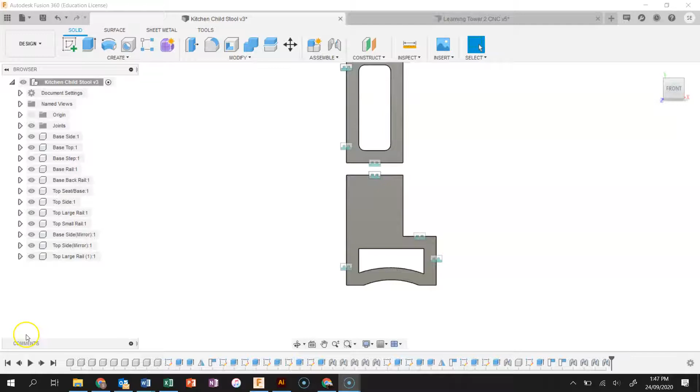Alright, g'day everyone. In this set of videos I'm going to be talking about how you prepare to route out, using the CNC router, a product like this—something that's made out of panels. Obviously this is a fairly complex one with lots of parts, but generally a product that's made out of panels.

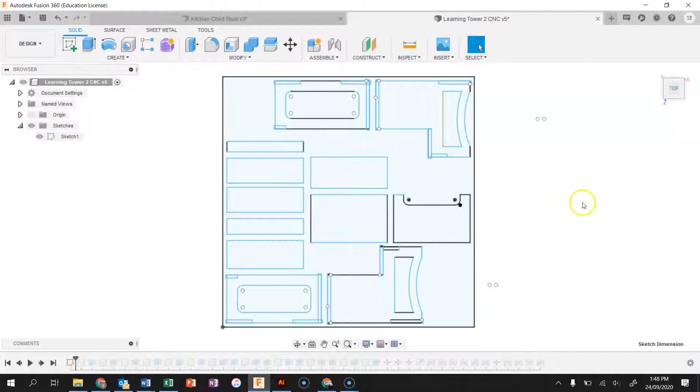And the way you're going to start this is by creating a 2D sketch in Fusion 360, just one sketch. It's not a particularly challenging task, you just need to know some key points, and then you should be able to do this fairly effectively. So you're going to start a brand new design, and start with a sketch. I'm going to pick this bottom plane as the place where I draw this sketch.

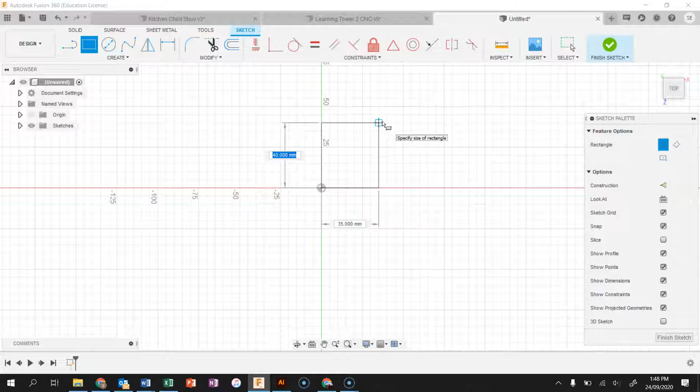Then using the rectangle tool, I'm going to draw the piece of material that I'm going to use. So if you're a Year 11 student, you'll be using a 1200 by 2400 board. If you're a Year 10 student, you'll be using a 1200 by 1200 board, so a square.

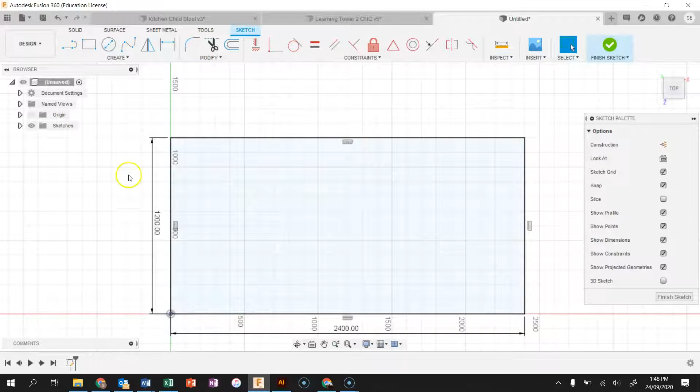So once you've got your area in there, we need to start drawing individual components. As we work in this, it's going to get messy because we're going to have lots of dimensions and things, so I'm going to move some of the dimensions I've got out. And then I'm going to start placing components, primarily using the 2-point rectangle tool because I want to create closed shapes, essentially closed profiles.

So let's imagine I have a part for my product which is 400 millimeters wide and 600 millimeters long. It's going to be a rectangle like that. I'll hit enter, and there's the rectangle for that part. That gives me the full outline of that component.

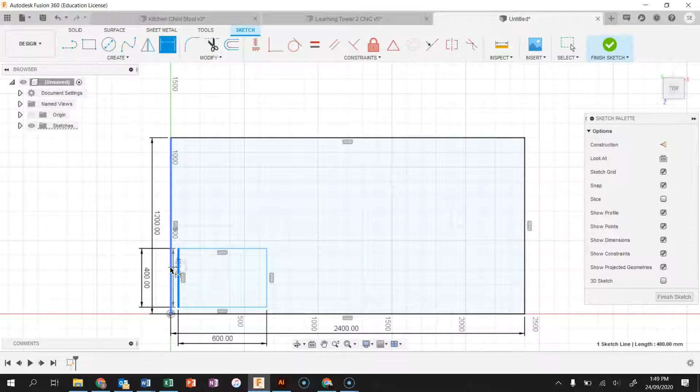Now, when I create components on this sheet and want to cut them out with the CNC router, I have to give them a correct dimension between the component and the outside of the piece of material, and then later between components. So initially I'll use the D key on the keyboard, or this button here, the sketch dimension button, to dimension my box 20 millimeters away from any edge.

The further you can put some of these dimensions away from the inside of this sketch, the simpler it's going to look and the easier it's going to be to read as you get more and more components in there. So 20 millimeters away on both of those.

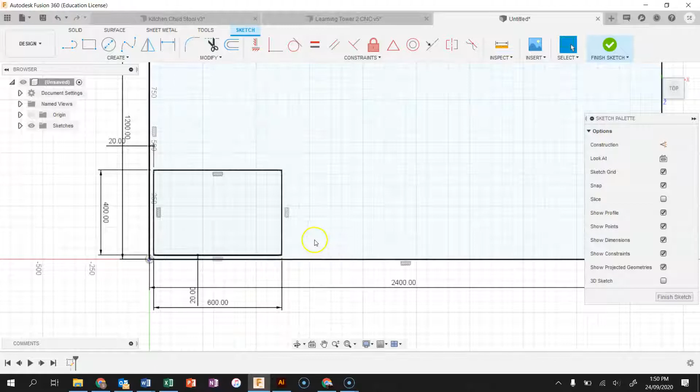Now where I've got another piece adjoining it, let's say I had two pieces the same size here, I draw in my next piece. I would again dimension from the outside edge by 20, but between components, 30 millimeters. Let's move that outside. So we've got those two shapes there, 30 millimeters apart and 20 millimeters in from the edge.

Now, as I start to add joints, I'm going to do this rather specifically. So if I want to add a rebate to the end of a piece like this, I'm going to select the 2-point rectangle tool, line it up with the end so I can see that little X, and then drag out just slightly, click, and create a rectangle that's bigger than my shape, like that.

Now the reason I've created a rectangle that's bigger is because this allows me to now dimension it to the correct size for that rebate. So let's assume I'm using 17 millimeter material. I'll click on one side of the rectangle and the other side and create a dimension of 17.

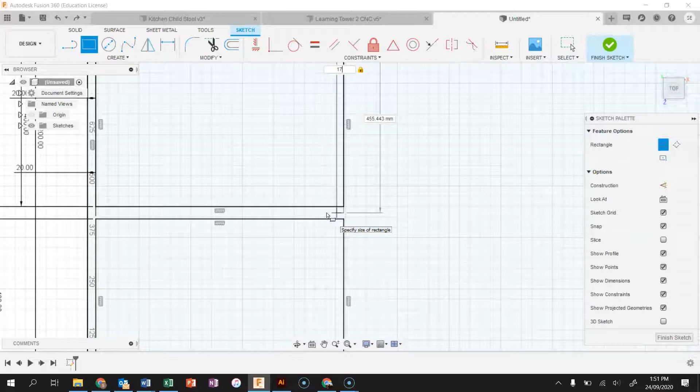Alright, I've just done that wrong because you can see mine's moved away from the edge, so I'm actually going to change that and redo it. I'm going to redo that rectangle, do exactly the same thing, but this time I'll leave the length over length, but for the width—if I hit tab, which currently says 42.062—I'm going to change it to 17 and hit enter again. So I've set the width of it, I haven't set the length.

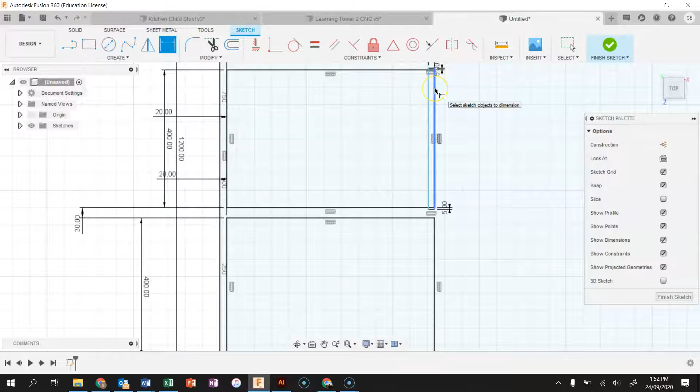To set the length, I'm going to put in a dimension of 5 millimeters away from the outside of my shape. The reason I do exactly 5 millimeters is so that my cutter comes just outside that area, so that I don't have to clean out any material later after I take my work out of the CNC router. So if I have a rebate going all the way off the edges, it must go 5 millimeters over the edge—that's really important. And then obviously the width is the width of the rebate that I'm after.

Where I do a housing, it's much the same. I would draw a rectangle somewhere in here at the correct width. Like I talked about before, the width would be 17 if I'm using 17 mil material. Not worried about the length right now, just hit enter. In fact, I don't want the length at all.

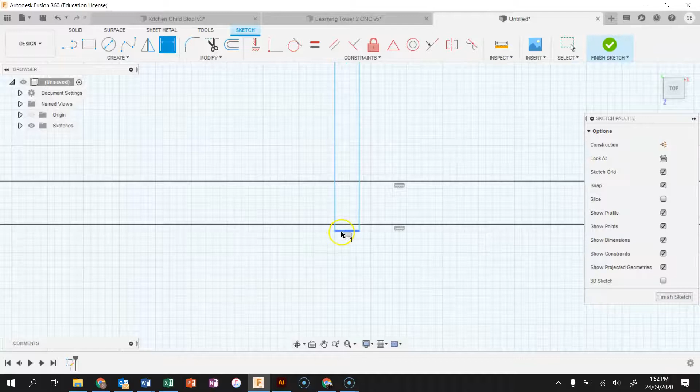Now I'll do the same thing I did before with the 5mm distance, and do that top and bottom. Right, so it's overhanging both sides there.

Next, I need to position this housing. Let's assume that between this housing and this rebate, I have 300mm of distance. Again, using the dimension tool each time. Every time you see me use it, I've hit the D key on the keyboard.

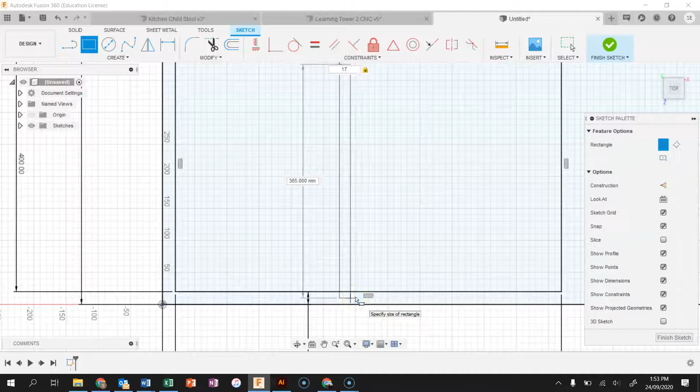The only other types of joints you may use are a stopped housing, in which case you would start inside your shape and go out over the edge a little bit. And again, you still make it the correct width, so 17, but the length is outside of your shape. As far as your dimensions for a shape like this, where you're stopping before you get to the edge, you'd want to stop probably 20mm from your edge.

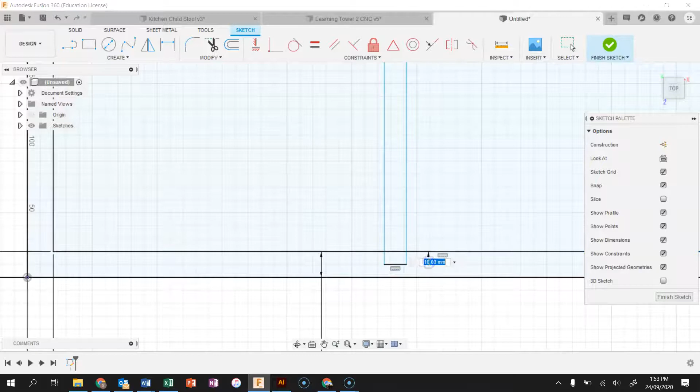In fact, I'm going to do my other end first, where my 5mm is, because that doesn't change. Right, so 5mm there, and then at the other end, 20mm from the outside of the shape. So this is a stopped housing. Now, thanks to that piece, it's going to stop when it makes that cut just in from the outer edge of my piece, so I won't be able to see the housing from, say, the front of my cabinet.

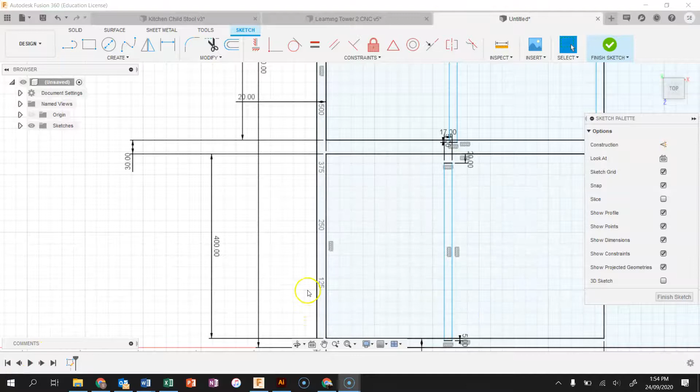Stopped housing. The other type of joint you might do is something like a miter joint on a corner. To do a miter joint, all you need to do is add a line over the top of your rectangle, from one corner to the other. That single line there is what the routing software will notice and will be able to set the engrave for.

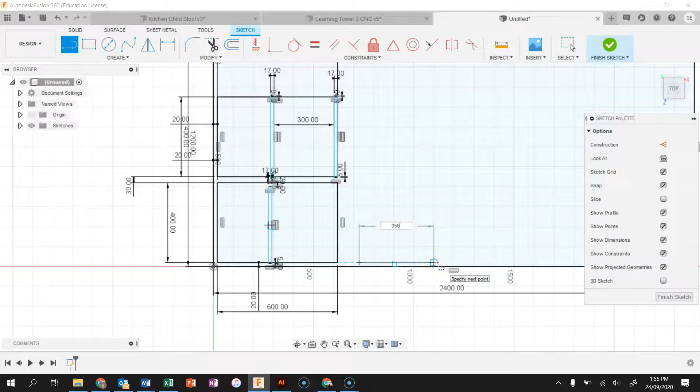When you use a stopped housing, one thing you do need to know about is how to shape your shelf. So if I was creating a shelf to go in this area, I would be creating something to a slightly different shape. So I'd probably create one side of it. Let's say my shelf is 350mm wide. I would create the sides of it so that they are not exactly the same length here.

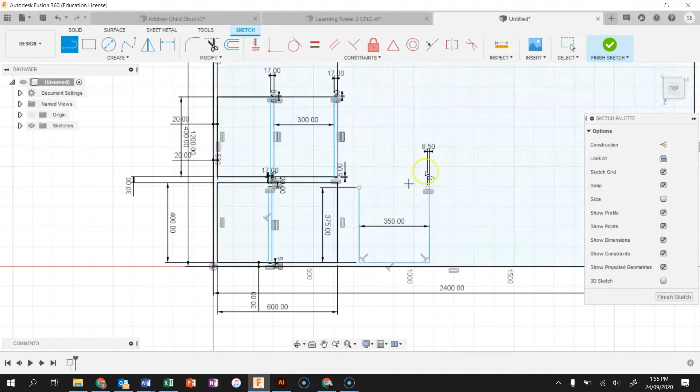That's 380. I'm going to make them 5mm less, so 375 on both sides. If I go to that point and then drag across, it will help me get that same position. Now I'm going to come in by the depth of my cut. So if it's 17mm material, I'm going to have an 8.5mm deep joint. I'm going to come in by 8.5 from that end, and this end, and then I'll come up.

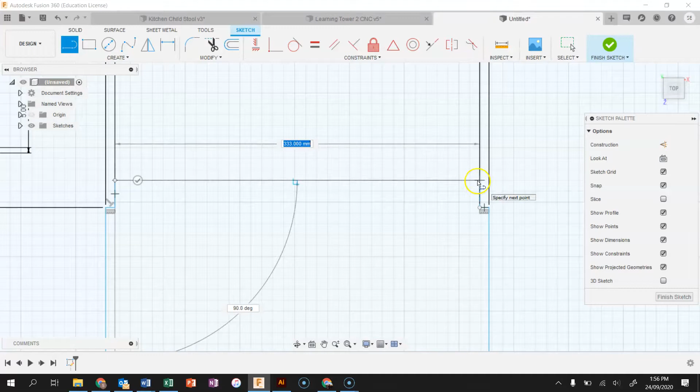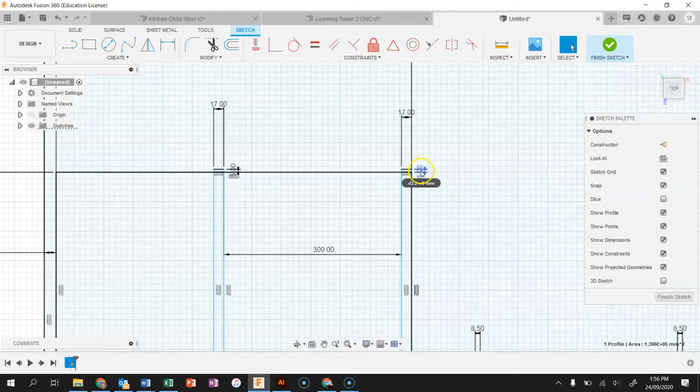Like I said, the most important things to make sure that we're able to cut it out is that it's 20mm from any edge and 30mm in between. When you're doing rebates or housings, you should leave them 5mm over the length. And where you have a stopped housing, the part that's joining it should be slightly different in length in this little cutaway here - it should be 25, 5mm more than whatever the stop area is. All right, so hopefully that'll give you enough information to go and model your pieces.

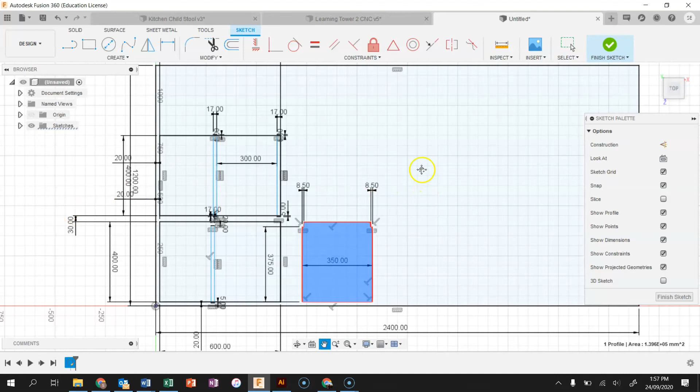One final tip, the grain direction of the plywood sheet is going left to right, this way. So if you want it running up the side of something, you would want to lay them on their side rather than upright in here. Otherwise it might look a little bit funny after it's all cut out. Okay, so there's some tips for you. Hopefully that'll help you go and draw the sketch for all your pieces. Thanks for watching.